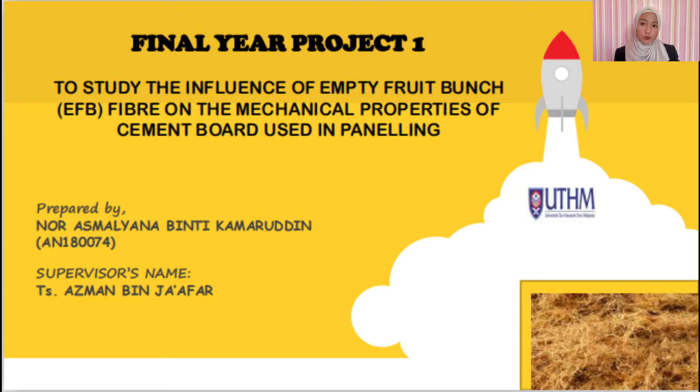My name is NOR ASMALYANA binti KAMARUDDIN, and in this video I'm going to present my final year project 1 entitled to study the influence of empty fruit bunch EFB fiber on the mechanical properties of cement board used in paneling. My supervisor is TS Azman bin Ja'afar.

Okay, for the abstract, the use of oil palm empty fruit bunch, or known as OPEFB fiber in organic composite, has been developed in order to displace the present material, predominantly wood fiber. OPEFB fiber is readily accessible as palm oil is one of Malaysia's largest agricultural crops. The empty fruit bunch EFB was collected from an oil palm mill located around Air Hitam.

Materials used in the making of cement board are cement, fiber, water and sand. The ratios used are 20%, 25% and 30% to determine the optimal ratio that's suitable for EFB fiber cement board. This research focuses on the effect of using different ratios on mechanical strength properties of EFB fiber cement board.

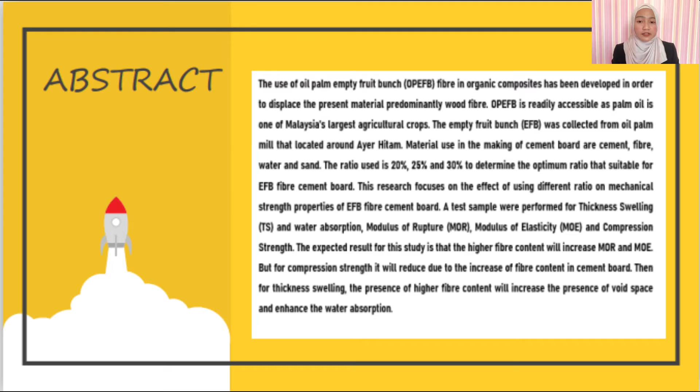A test sample was performed for thickness swelling TS and water absorption WA, modulus of rupture MOR, modulus of elasticity MOE, and compression strength. The expected result for this study is that the higher fiber content will increase MOR and MOE. But for compression strength, it will reduce due to the increase of fiber content in cement board. Then, for thickness swelling, the presence of higher fiber content will increase the presence of void space and enhance the water absorption.

For background of the study, Malaysia is one of the main producers of oil palm. Besides, it is the most profitable crop, so more long-term strategies for its capacity as resources in structural and non-structural implementation are needed. The use of waste material for construction material has become increasingly prevalent in the building industry. Natural fiber composites are very cost-effective, low energy consumption materials. They are both environment conscious and long-lasting.

Biocomposite materials are often used to reduce toxicity and environmental impact. The use of abundant natural resources would help to minimize toxic pollution. According to the findings, the combination between EFB fiber and cement will increase the efficiency of biocomposite material. Natural fiber can be used as a binder for EFB products since it contains no residual oil.

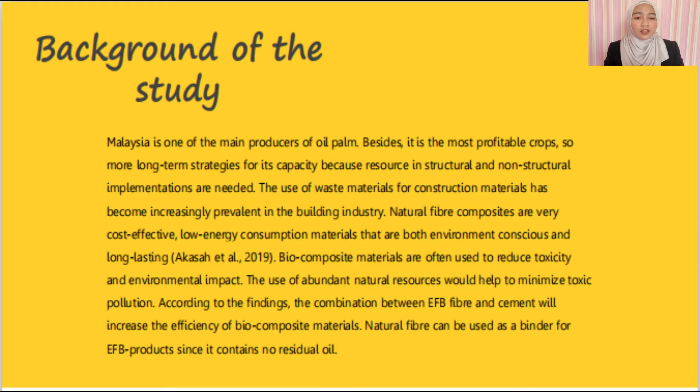In this study, I have 3 problem statements. First, compatibility issues involving cement and fiber caused by the presence of glucose and oil tend to hinder cement hydration considerably. Previous research has proposed that the most successful approach for resolving this problem is to pre-treat natural fiber with sodium hydroxide and to speed up the cement curing period, which may increase natural fiber compatibility with cement.

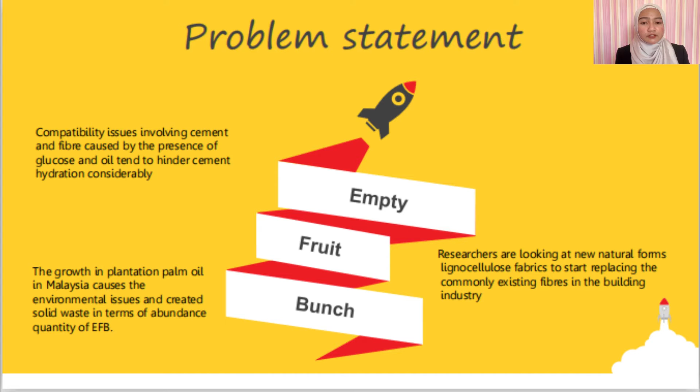The second one is the growth of palm oil plantations in Malaysia causes environmental issues and creates solid waste in terms of an abundant quantity of EFB. According to MPOB 2013, Malaysia's fresh fruit bunch FFB production increased to 99.85 million tons in 2011 from 97.38 million tons the year before. And the last one is researchers are looking at new natural lignocellulose fiber to start replacing the commonly existing fiber in the building industry.

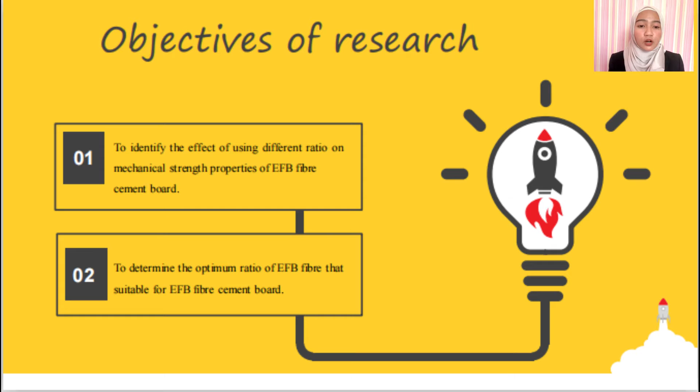I have 2 objectives of research. Number 1, to identify the effect of using different ratios on mechanical strength properties of EFB fiber cement board. Number 2, to determine the optimal ratio of EFB fiber that is suitable for EFB fiber cement board. The scope of my study is I use empty fruit bunch EFB as the reinforcement of cement board. The ratios that I use are 20%, 25% and 30%.

The tests that we conducted are modulus of elasticity MOE, modulus of rupture MOR, thickness swelling and water absorption, and the last one is compression strength. The study is focused on the mechanical properties of EFB cement board. EFB fiber will be collected from an oil palm mill located around Air Hitam.

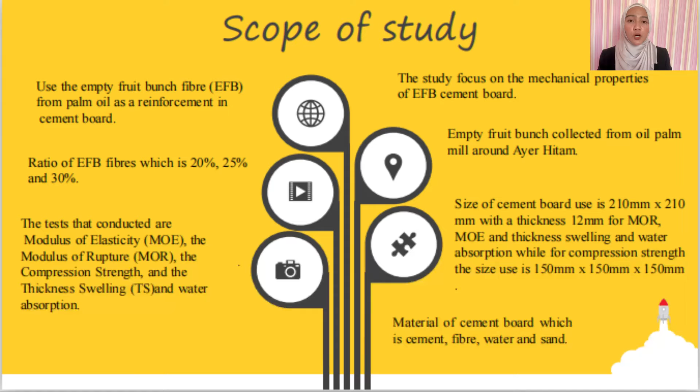The size of cement board for MOR, MOE and thickness swelling and water absorption is 210 mm times 210 mm with a thickness of 12 mm. Then for the compression strength, the size used is 150 mm times 150 mm times 150 mm. The materials used in this cement board are cement, water, fiber, and sand.

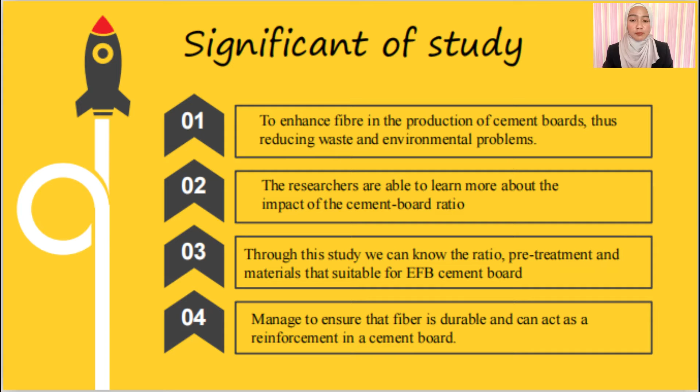I have 4 significances of my study. First, to enhance fiber in the production of cement board, reducing waste and environmental problems. Number 2, the researchers are able to learn more about the impact of the cement board ratio. Then, through this study, we can know the ratio, pre-treatment, and material that's suitable for EFB cement board. And the last one is to ensure that fiber is durable and can act as a reinforcement in the cement board.

I'm going to share what cement board is. Cement board is a mixture of cement and reinforcing fiber that is commonly utilized as a tile backing board. It is also known as a building material, which can also be used as an interior surface and also roofing material.

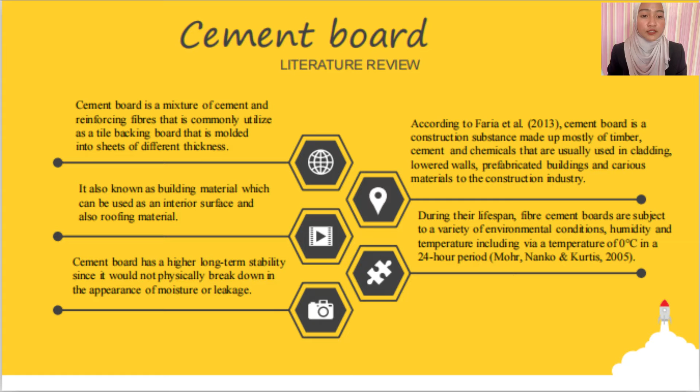Then, cement board has a higher long-term stability. According to the previous study, cement board is a construction substance made up mostly of timber, cement, and chemicals that are usually used in prefabricated buildings. During the lifespan of cement board, the fiber cement board can sustain a variety of environmental conditions, humidity, and temperature, including a temperature of 0 Celsius in a 24-hour period.

Empty fruit bunch, also known as EFB. EFB is a lignocellulosic material, mostly including cellulose, lignin, and hemicellulose. EFB fiber is a biodegradable and non-hazardous product. Natural fibre has a high potential for use as a composite material because it is inexpensive, sustainable, biodegradable, and has the capacity to minimize CO2 emission. The EFB fibers are free of toxins, non-carcinogenic, and contain soft parenchyma cells.

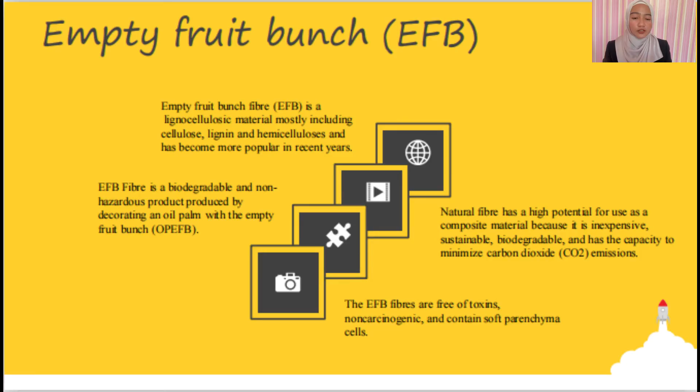So I'm gonna present my methodology. As you can see, this is my flowchart. I start my project with preparing the material needed, which is empty fruit bunch, cement, sand, and water. After preparing all the material, I'm gonna start with the cement board fabrication process. In this process, there are a few steps: first we need to weigh the material, then mix all the material using a mixer machine, forming, pressing to get the desired thickness, curing and cutting according to the size needed.

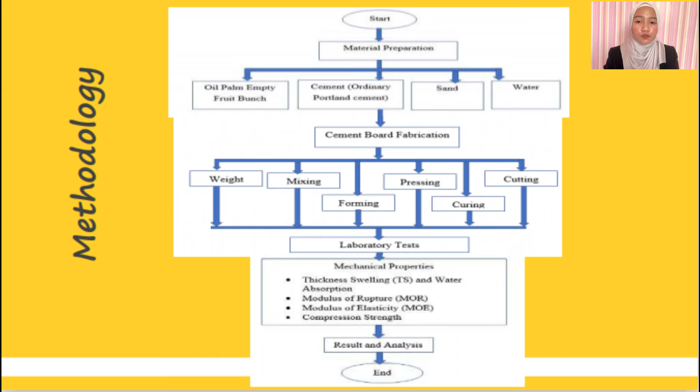After settling all the processes, we're gonna proceed with laboratory tests, which are thickness swelling and water absorption, MOR, MOE, and compression strength. After the tests, we need to do result and analysis.

This is my material preparation. The main materials for cement board are cement, sand, fiber, and water. The ratios I choose are 20%, 25%, and 30%. The control sample selected is the 1:3:0 proportion, which is cement, sand, and fiber. The initial water content is 50%. The water cement ratio is 0.85. The fine aggregate is clean river sand, with a fineness modulus from 2.0 to 3.5 and a maximum particle size of 4.25 mm. The size of fiber is around 0.5 cm to 1.0 cm.

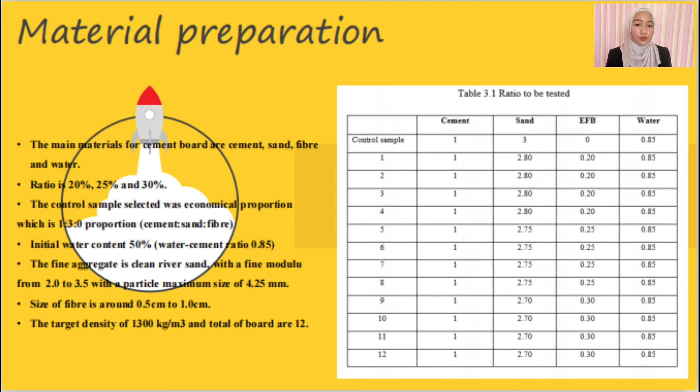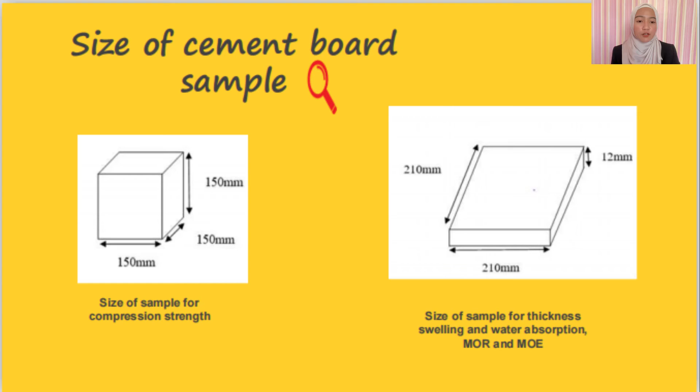The table is about the ratios to be tested. I will refer to all the ratios in the table to do my laboratory test. This is the size of the cement board. Picture number 1 is the size of sample for compression strength, and picture number 2 is the size of sample for thickness swelling and water absorption, MOR and MOE.

So for the fabrication process, as I mentioned just now in the flow chart, it has a few steps. Number 1, weigh. We need to weigh all the material, then mix all the material using a mixer machine. Number 3, forming. All the mixed substance is poured into a wooden mold measuring 210 mm times 210 mm and 150 mm times 150 mm. Number 4, pressing. It will be stretched and flattened by hand to achieve the desired thickness.

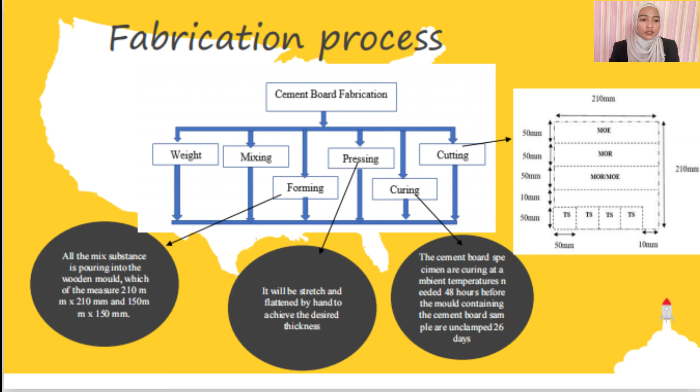Number 5 is curing. The cement board specimens are cured at ambient temperature for 48 hours before the mold containing the cement board sample is removed, then 26 days. And the last one is cutting. I will cut the cement board according to the size needed for the tests. For MOR and MOE, the size that I will cut is 210 mm times 50, and for thickness swelling and water absorption it is 50 mm times 50 mm.

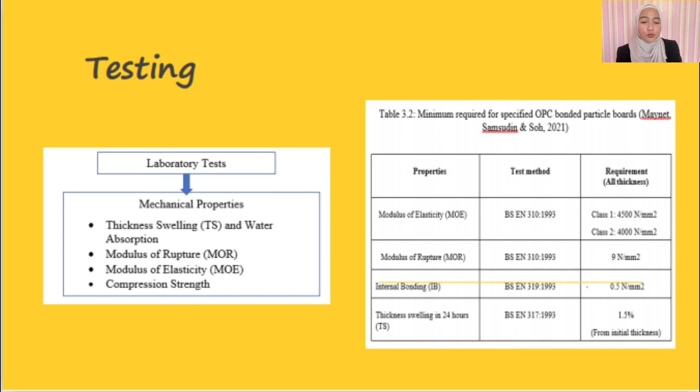These are the tests that I need to conduct during my study, which are thickness swelling TS and water absorption, modulus of rupture, modulus of elasticity, and compression strength. In the table is the minimum required for specific OPC bonded particle board. So I need to refer to this table to know whether my test achieves the requirement or not. For example, I need to achieve 1.5% for the thickness swelling.

Okay, for the expected result, I expect that MOE will achieve the optimum with the ratio 30%. It is because the fiber can act as a reinforcement in the cement board to enhance the strength. Then for MOR testing, samples with ratio 25% and 30% will display MOR values significantly higher than others due to the increase of fiber quantity in the cement board.

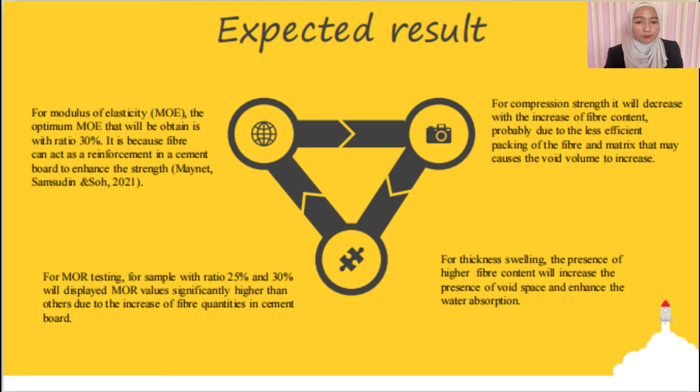Then, for compression strength, I think it will decrease with the increase of fiber content. It is due to the less efficient packing of the fiber and matrix that may cause the void volume to increase. From previous studies, many of them said that when fiber content increases, the compression strength will decrease. Then the last one, for thickness swelling, the presence of higher fiber content will increase the void space and enhance the water absorption.